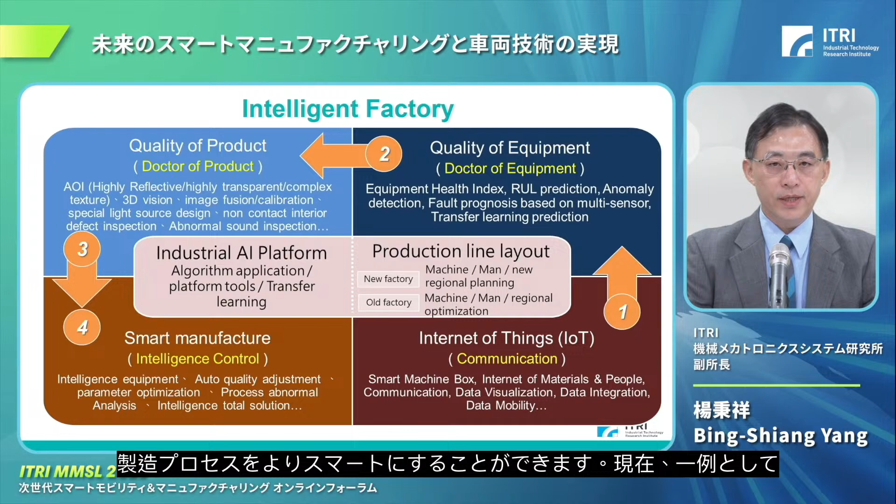For the intelligent factory, we try to connect equipment and materials together with Internet of Things. We also have sensors integrated with our algorithm to quantify the status of the equipment, then connect the equipment together with the parameters. We also incorporate AI technologies in different stages of manufacturing to control the quality of the product. To integrate all of this means we can make the manufacturing process smarter. Here is an example. Now we try to integrate systems.

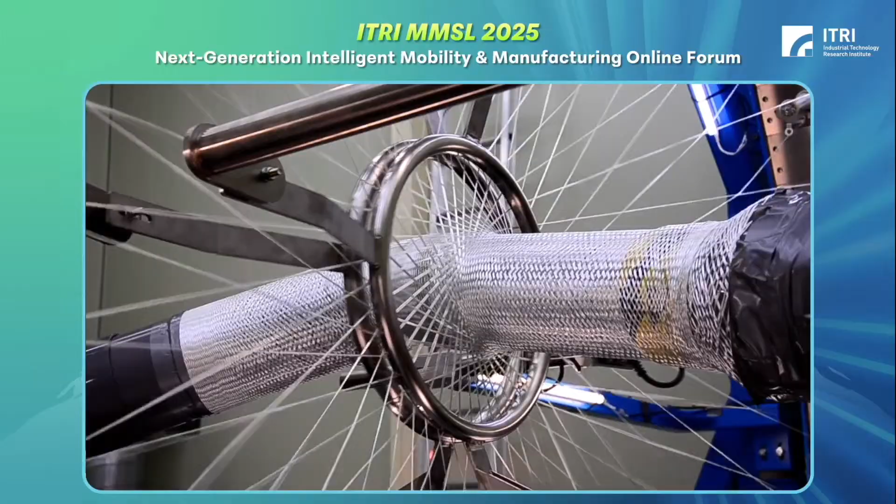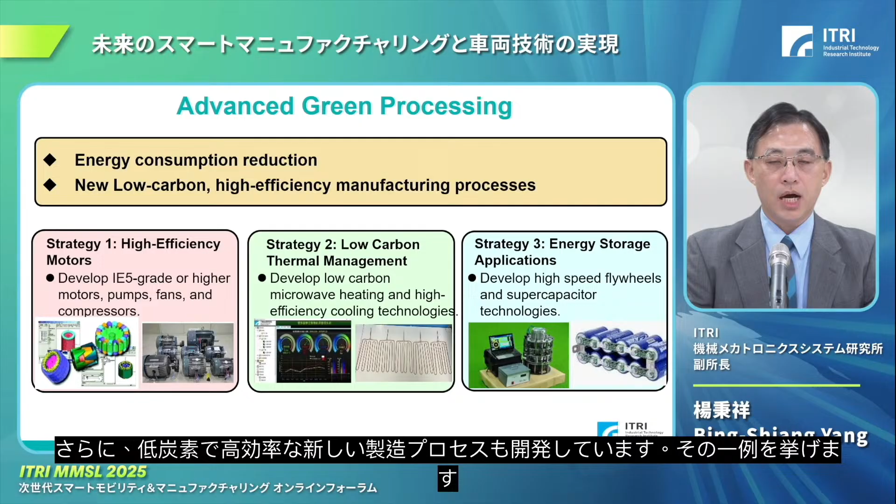As a world trend of low carbon or zero carbon emission, we try to reduce energy consumption in different manufacturing processes with different strategies. The first is to provide high efficient motors that can be used in different stages of manufacturing, and also low carbon thermal management systems with energy storage applications, such as high-speed flywheel technologies and supercapacitor technologies. We also developed new low-carbon, high-efficiency manufacturing processes.

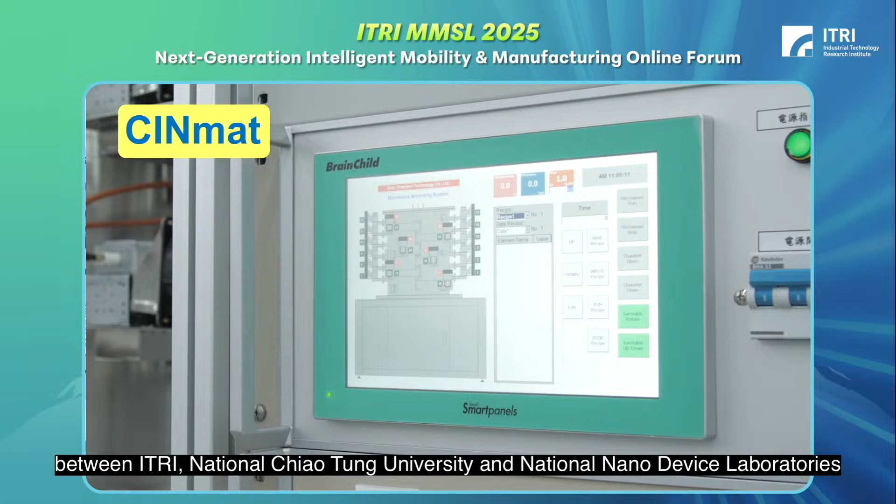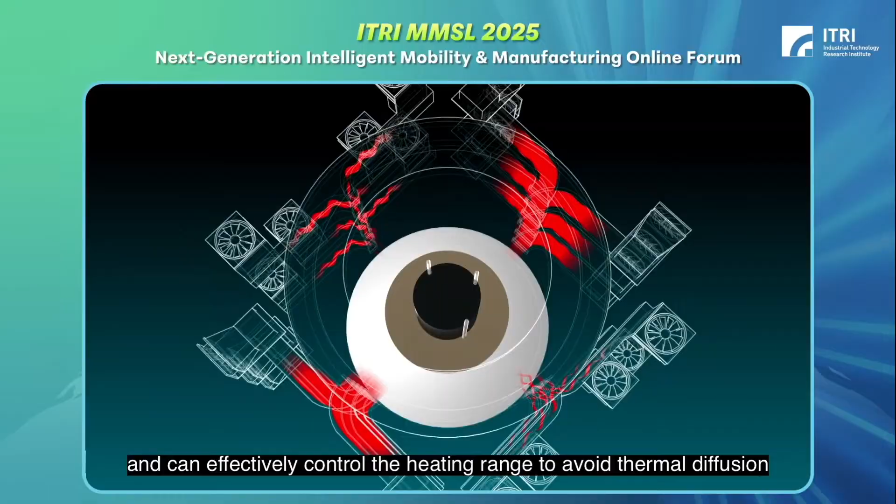Here is an example. CINmat microwave annealing technology is the result of a tripartite collaboration between ITRI, National Chiao Tung University, and National Nano Device Laboratories. It can process multiple wafers at one time and can effectively control the heating range to avoid thermal diffusion. The technology saves a great deal of time and energy compared to rapid thermal annealing.

The frequency of the microwave tubes used in the new technology is 2.45 gigahertz, the same as that of a typical domestic microwave oven. A 2.45 gigahertz magnetron costs only about one-tenth of the price of the 5.8 gigahertz high-frequency microwave magnetron currently used by manufacturers, while its average lifetime is six times longer, which greatly reduces maintenance costs.

As you might know, Taiwan is famous for semiconductor manufacturing, so we also have a division dedicated to these technologies. We use multi-physics simulation in different stages of the manufacturing process, such as plasma etching or deposition and wet process for advanced packaging. We also provide grinding and polishing equipment that can be used on different materials, including optical components.

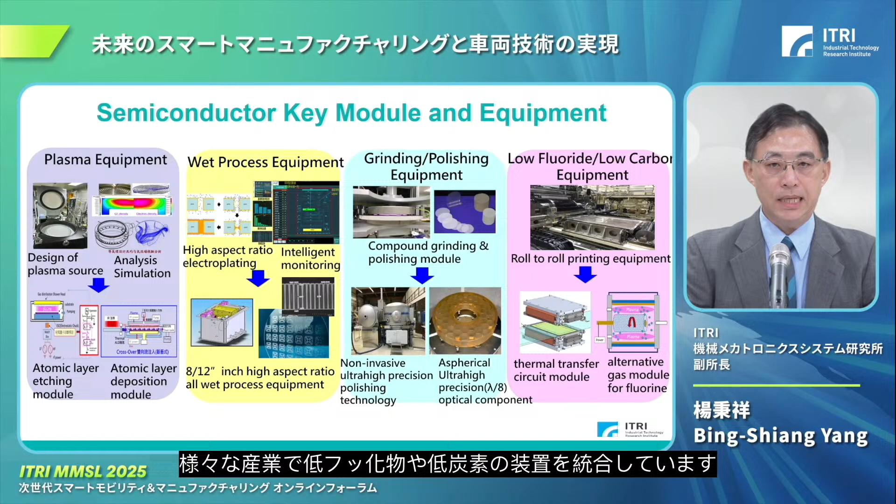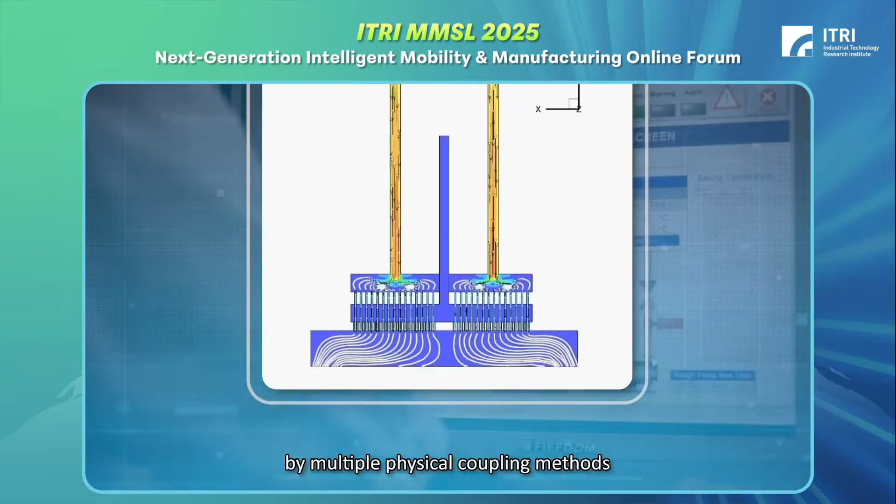We also integrate low fluoride or low carbon equipment in different industries for green technologies. The following is the principle of the hybrid ALD equipment. The vertical flow field is simulated by multiple physical coupling methods into the 12-inch process chamber through the aeration module, and the special aeration hole design is used to improve the uniformity of the overall chamber flow field.

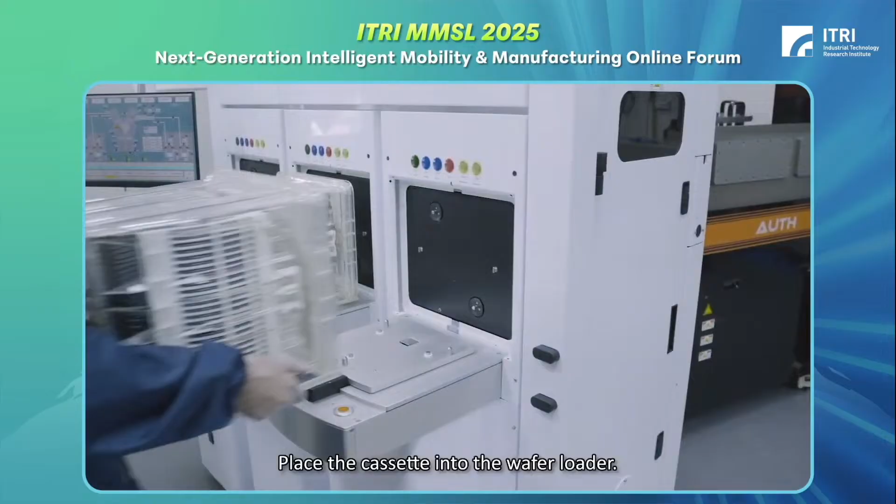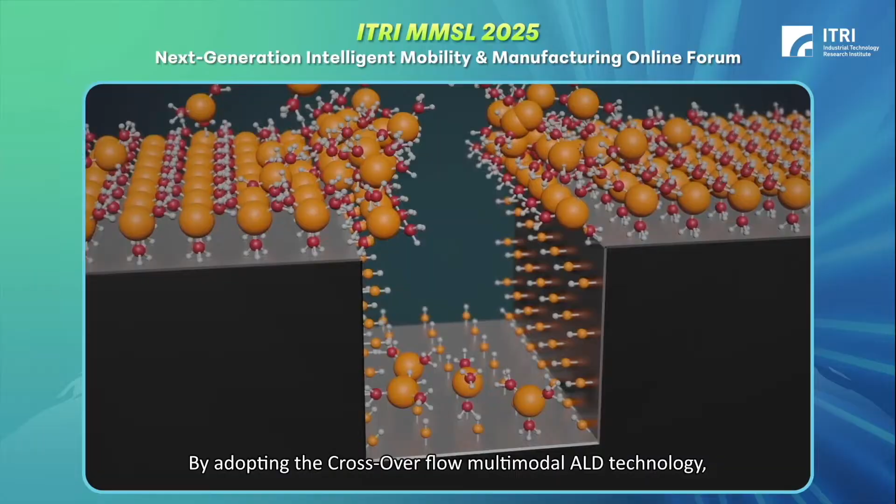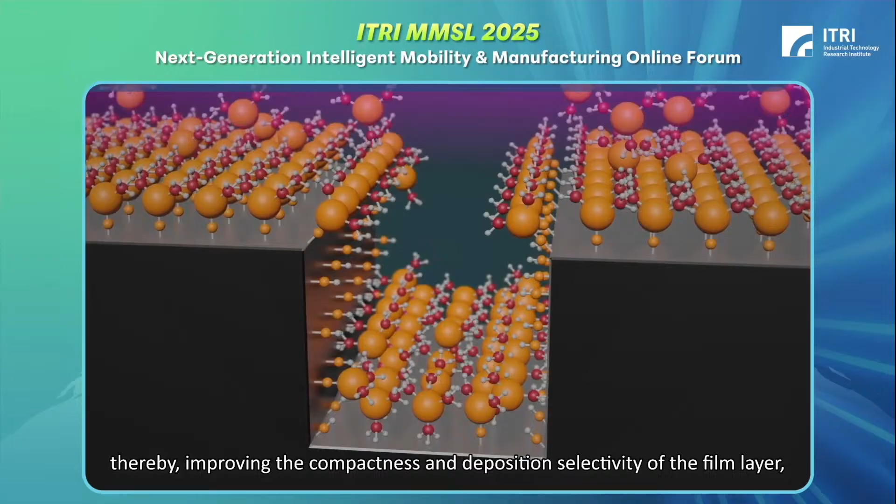Place the cassette into the wafer loader. System parameter confirmation. By adopting the crossover flow multimodal ALD technology, the thermolysis and plasma bias dual mode is used to enhance the collimation of deep hole coatings, thereby improving the compactness and deposition selectivity of the film layer, achieving multi-composition, high-step coverage, and uniform coating deposition.

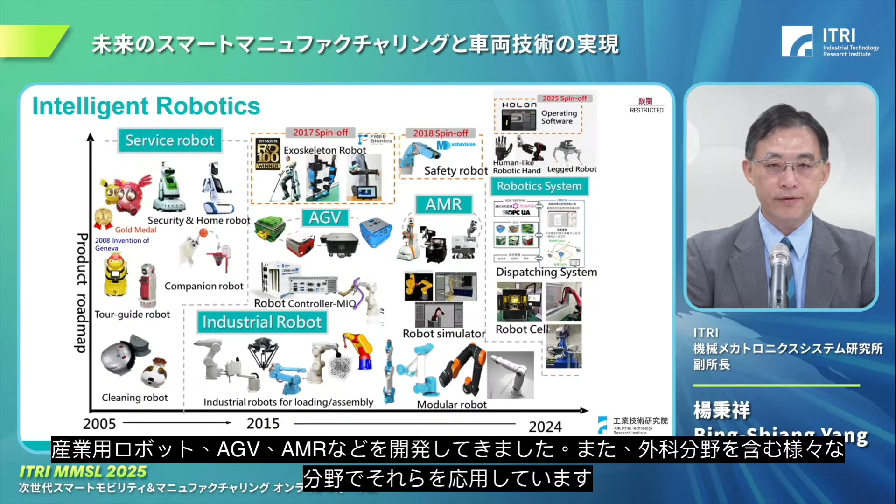The robot arm removes the wafer from the process chamber and transfers it to the discharge chamber. To combine the different manufacturing processes, we need robotic technologies. Over the past 20 years, we have developed different types of service robotics, industrial robots, AGVs, and AMRs. We also apply these in different fields, including surgical fields. We recently have international collaborations with many European countries on handling AI-enhanced robotic technologies for flexible manufacturing.

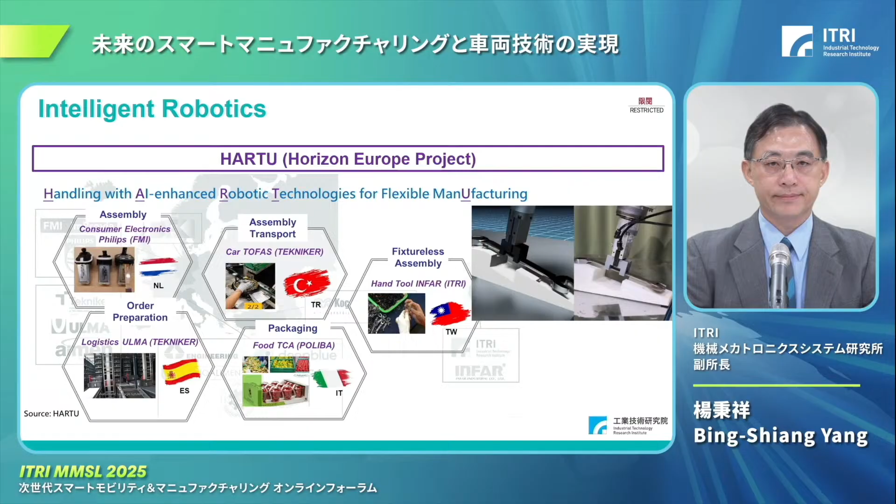That's for manufacturing. Now for mobility, we developed technologies to fulfill the needs for electric vehicles, from fast charging stations, onboard chargers, battery packs, energy management systems, vehicle control units, even inverters and motors. We work with industrial partners to develop the whole system.

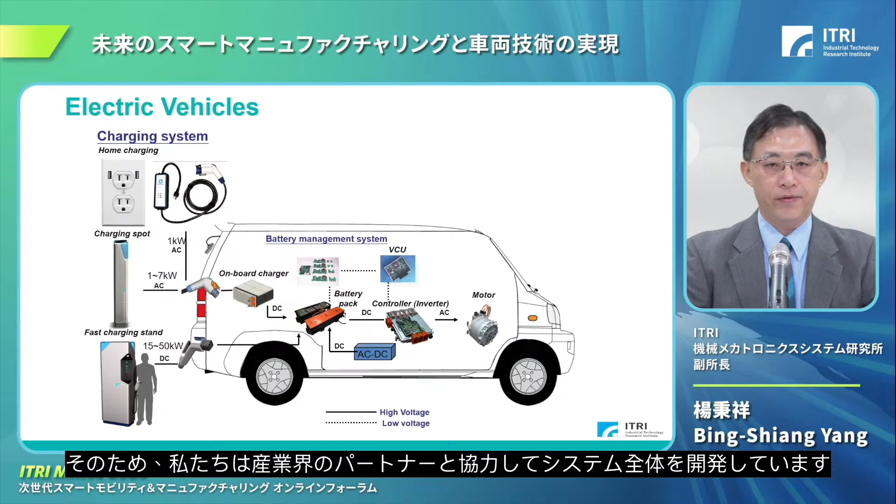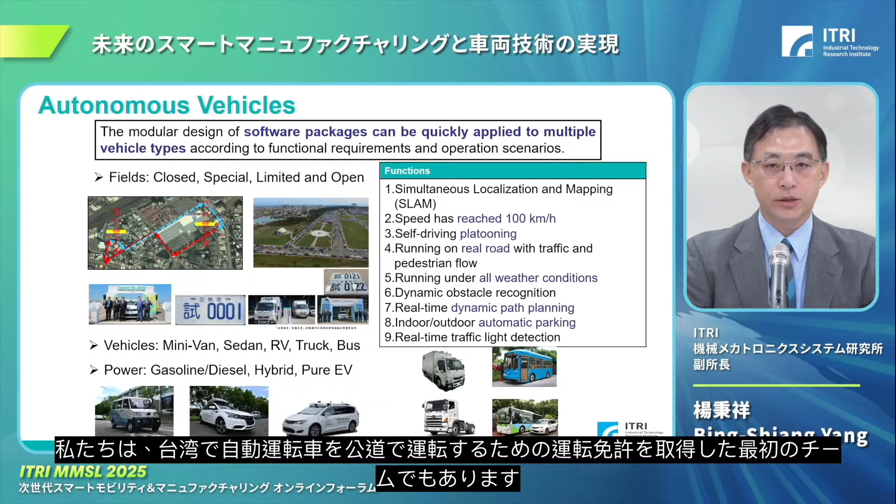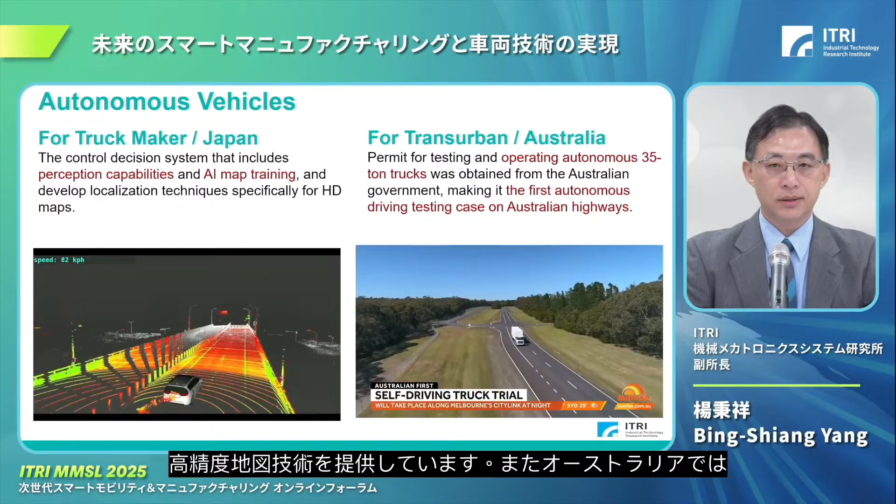We are also the first team to have the driving license to drive our autonomous driving vehicles on real roads. Now we have different types of autonomous driving vehicles. We also export these technologies to international partners, such as in Japan. Now we have high-definition map technologies, and in Australia we can drive a 35-ton truck on the highway.

As for ground vehicles, in the air we also have unmanned aerial vehicles. We target more on the high payload, specific application UAVs. Over the past few years, we have developed flight control technologies, high power motor generating technologies, and integrated them into systems with different payloads and applications.

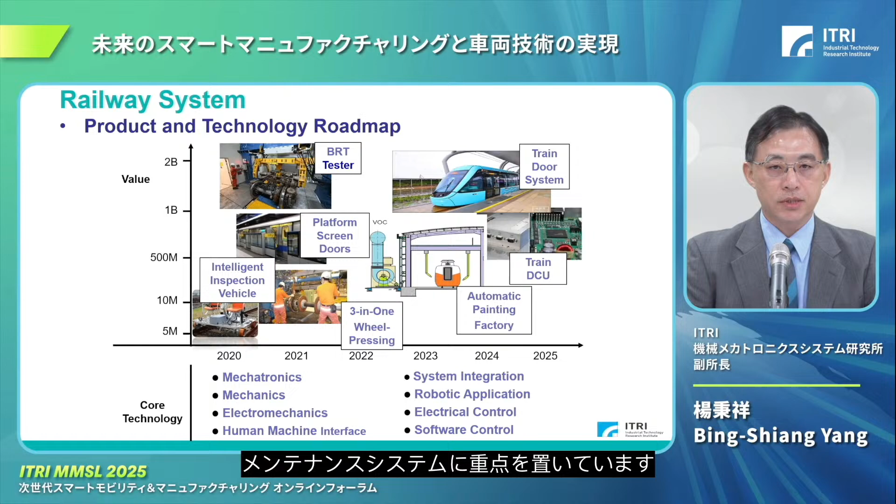So with this, I give you a quick overview of our capabilities. If you are interested in any of the technology, feel free to contact us.

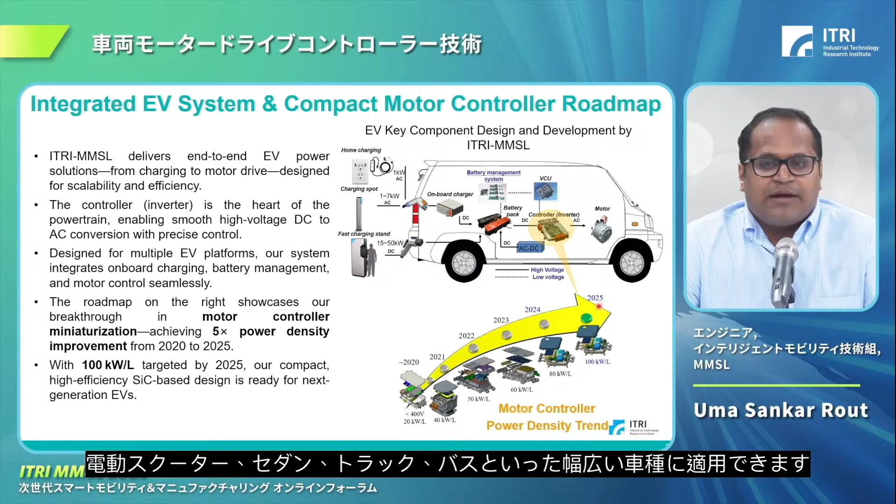Now let me take you behind the scenes of how we make sure every motor controller works right the first time. We begin with detailed 3D multiphysics simulation to analyze the heat, magnetic flux, and electrical stress. We tweak the design until it meets thermal and loss limits. Next, we build the prototype and run the double pulse test to assess the switching losses and voltage overshoot in real circuits.

In hardware-in-loop testing, we connect the controller to a real-time simulator emulating a motor. This allows us to run thousands of fault cases safely and efficiently. In vehicle dyno testing, the controller is mounted on a real vehicle in our dyno lab to evaluate the efficiency map, acoustic noise, thermal rise, and system response during actual drive cycles. Each stage helps us catch potential issues early, reducing prototype iteration, saving time, and cutting costs.

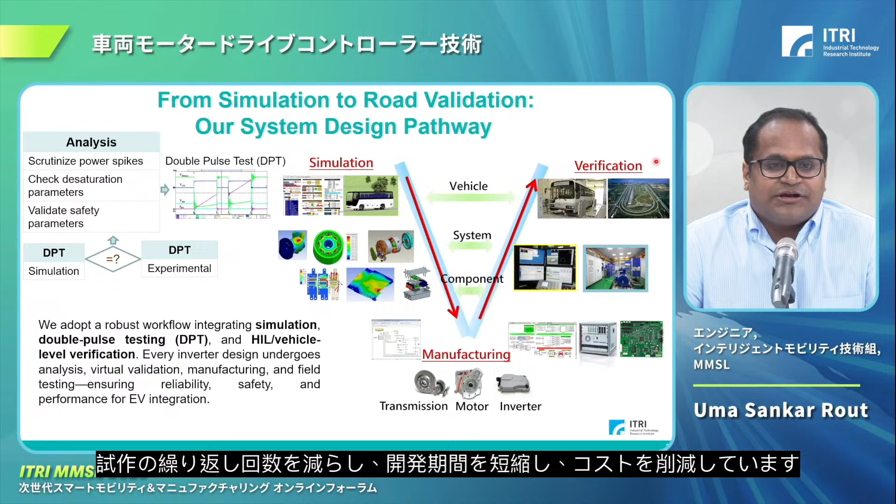Quality is our promise. We operate four specialized labs. Virtual vehicle labs validate the control algorithm across millions of virtual kilometers. Power labs measure efficiency, EMI, and transient voltage behavior. Battery and charger labs ensure communication reliability across chargers, BMS, and environmental extremes. Vehicle labs execute complete vehicle validation: vibration, splash water, dust, and shock.

We also follow a strict pre-test checklist: cable torques, sensor calibration, emergency stop mechanisms, proper fuse settings. For endurance, we test the inverter at 85 degrees Celsius for hours, subject them to hours of multi-axis vibration, and assess corrosion in salty spray chambers. Thanks to this rigorous process, our field failure rate is very low, ensuring low recalls, longer uptimes, and happier drivers.

We follow a modular design philosophy. Power module blocks contain SiC switches, DC bus blocks integrate high density ceramic capacitors, gate driver blocks control each switch precisely, and control boards execute the advanced motor controller algorithms. This block-based approach allows us to serve multiple vehicle classes, from 6 kilowatt scooters to 250 kilowatt heavy duty trucks, all using the same scalable architecture.

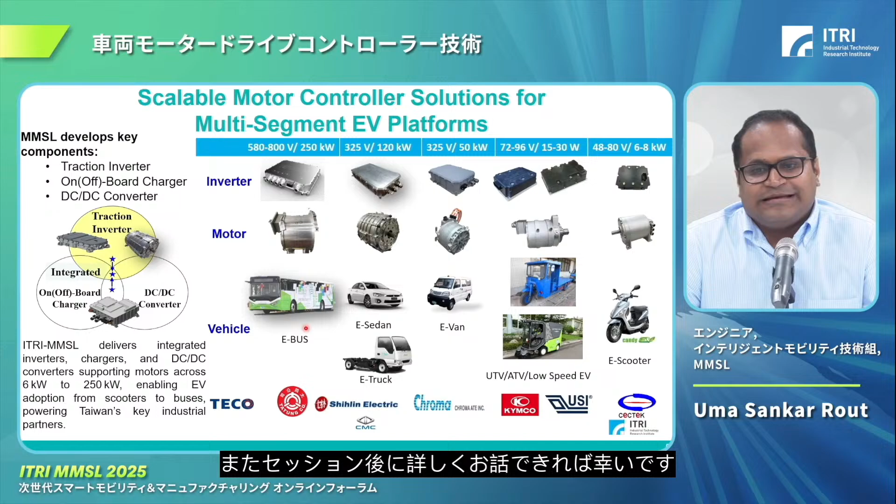We have combined SiC technology, compact power design, and rigorous validation to deliver a compact, reliable, and scalable motor controller solution for the EV industry. We welcome partners ready to join us in pushing the boundaries of what electric vehicles can achieve. Thank you for your attention. I'm open for questions now, or happy to discuss details with you after the session.

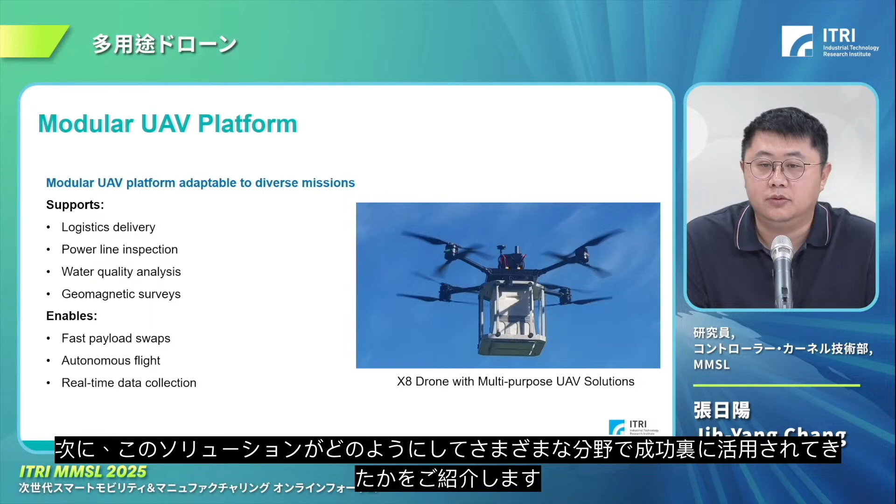Next, I will walk you through how this solution has been applied successfully across various fields. From left to right, here are three key application scenarios of the X8 drones.

On the left-hand side is logistics delivery. The X8 drone enables efficient transport of goods to destination locations. The key benefit is reduced labor cost and improved delivery efficiency.

In the center of this picture is the power line inspection application. We developed and use AI-based image recognition so the drone can accurately detect the position and temperature of high voltage power lines to identify damage or overheating problems. The key benefit is greatly shortened inspection time and early detection of faults, allowing timely maintenance and reducing overall operational costs.

Finally, on the right-hand side is the water quality sampling application. Traditionally, sampling water in large reservoirs required a lot of labor, which was time-consuming and inefficient. However, with drones, water samples can now be collected rapidly and accurately. The key benefit is minimized manpower needed, accelerated data collection, and improved overall efficiency of water quality sampling.

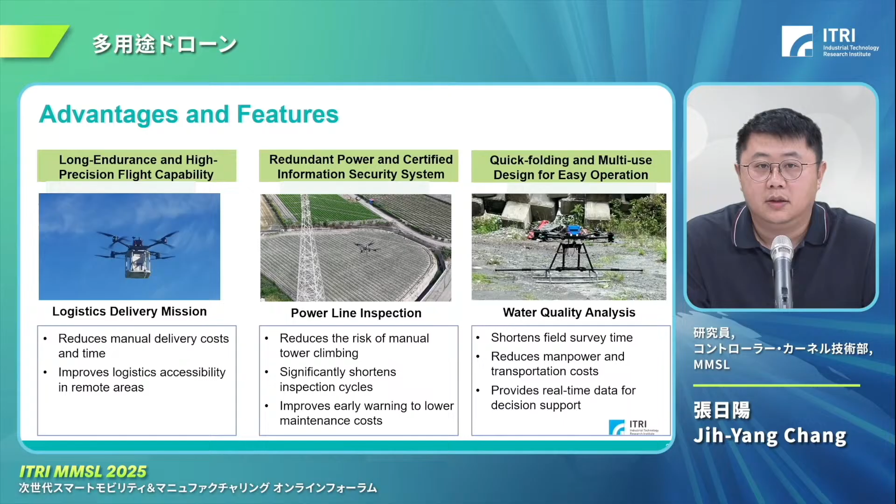Our multi-mission drone solution is designed precisely for this high-value segment. Its target is to be practically deployed in areas such as logistics delivery, infrastructure inspection, or public military service missions, ensuring the UAV technology delivers real-world impact and value.

Next, I'd like to share some real successful cases. This case is as shown in the slide - we integrate the X8 drone into logistics delivery applications.

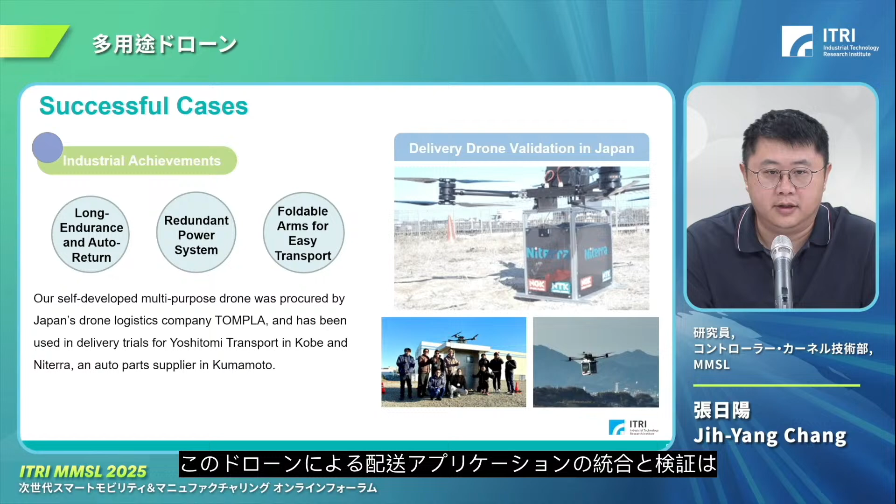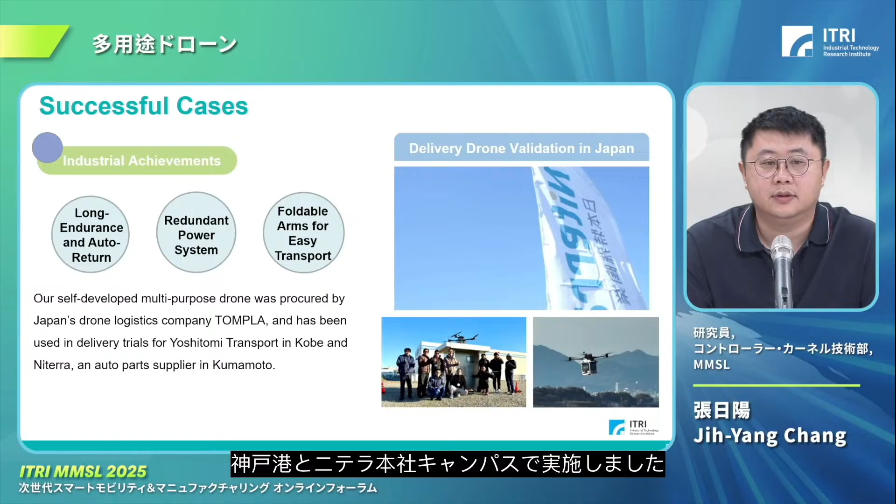We cooperate with a Japanese company named TOMPLA, which is focused on logistics technologies. We conducted integration of the drone for delivery applications and validation at Kobe Port and the Niterra headquarters campus. This cooperation not only demonstrates the mission but also serves as a strategic step towards entering the Japanese market.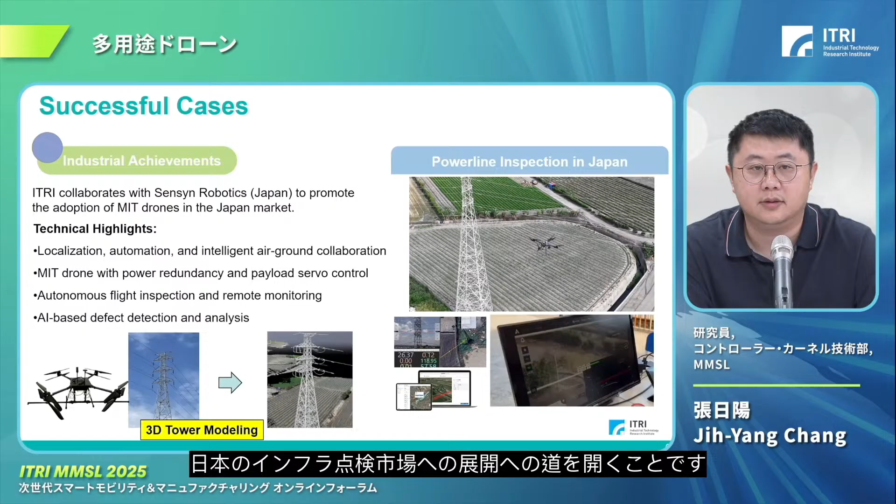Lastly, we'd like to share another successful case, this time in collaboration for water quality sampling. We equipped the MIT drone with a system for harvesting water samples and performed a live demonstration at Sun Moon Lake in Nantou, Taiwan.

Compared to traditional manual sampling, the drone-based solution reduced operating time by over 80% and significantly lowered the manpower needed. These cases highlight the strong potential of UAVs in environmental monitoring and sampling, especially for fast, large-scale water sampling operations.

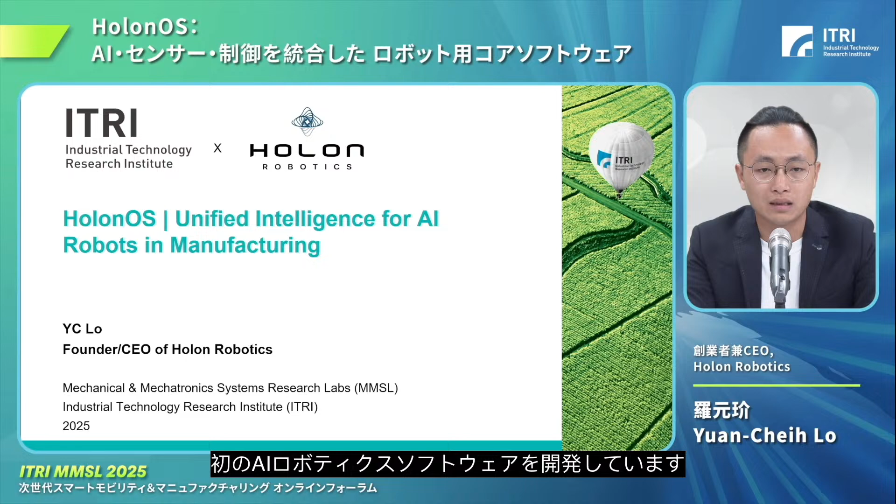Holon Robotics is a software company. We preserve industrial knowledge through AI, and we preserve manufacturing knowledge through automation by unifying AI, robots, and sensors, making intelligent manufacturing a reality.

We have 7 experts across robotics R&D, finance, marketing, and operations, combining technical depth with business execution. After 4 years incubating in ITRI, we officially spun off this year and closed a 0.5 million dollar angel round.

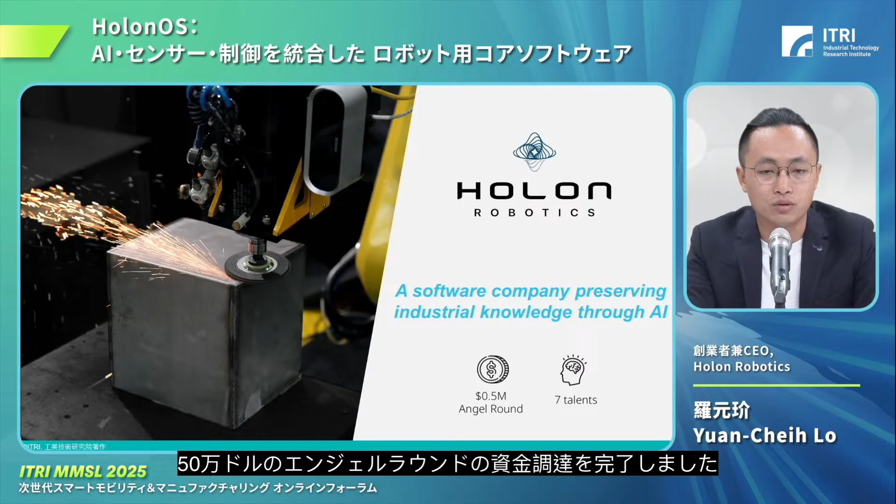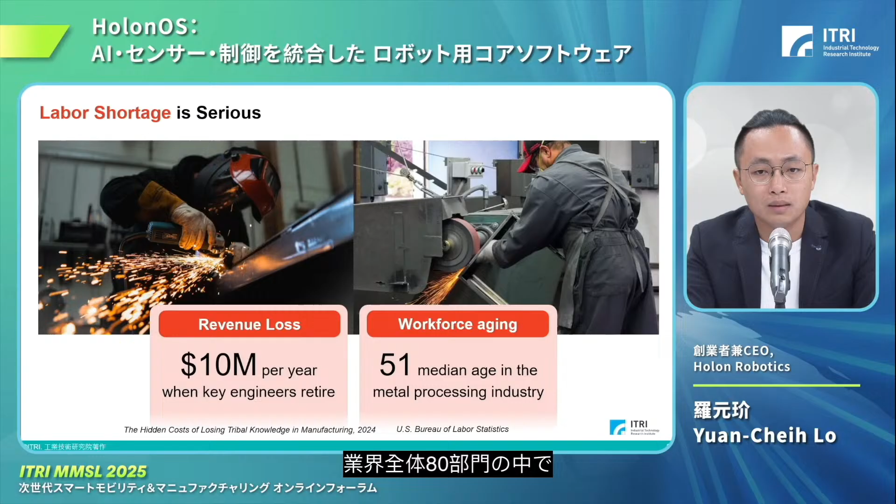As labor shortage is serious and happening around the world, in manufacturing, companies lose up to 10 million in revenue when their senior engineer retires or exits. In metal processing, it's much more urgent. The median worker age is 51, the highest among 80 other industries.

After 30 years of automation, what's holding it back? Three reasons. Industrial robots have been limited to mass production, requiring specialized expertise, complex programming, and manual adjustment. First, hard to learn. Manufacturers need at least 2 years to train a robotics engineer, making skilled labor a major barrier, especially difficult because we are facing a labor shortage issue.

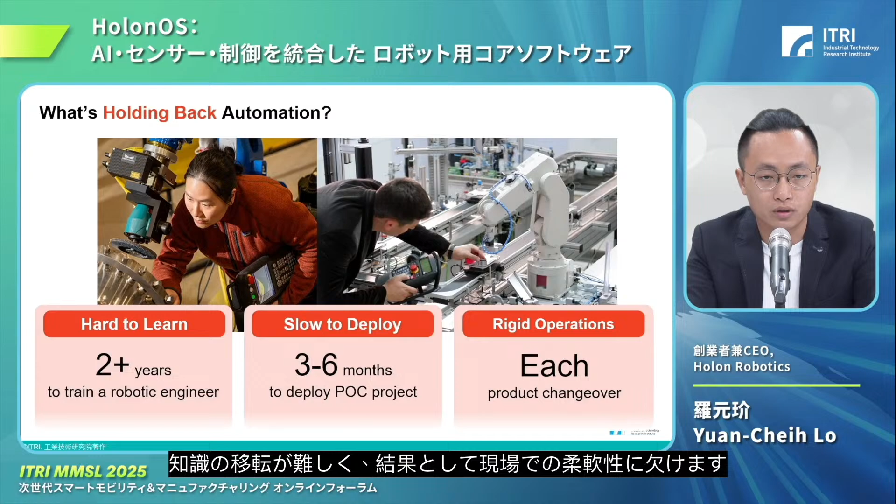Once they leave, the knowledge goes with them. Second, time-consuming. Developing, testing, and validating a robotics automation project takes 3 to 6 months to ensure production feasibility, making the process highly time-consuming. Third, rigid. Even after deploying robotics automation in production, every changeover needs manual reteaching and adjustment. The knowledge is hard to transfer, making robotics hard to use in today's fast-changing manufacturing needs.

So we envision the robot not as a tool, but as an intelligent, self-evolving partner. That's why we built an AI-driven operating software with a human-in-the-loop approach. It allows the robot to learn directly from the operators and turn the experience into intelligence. We make robots that don't just do tasks, they understand how to do tasks.

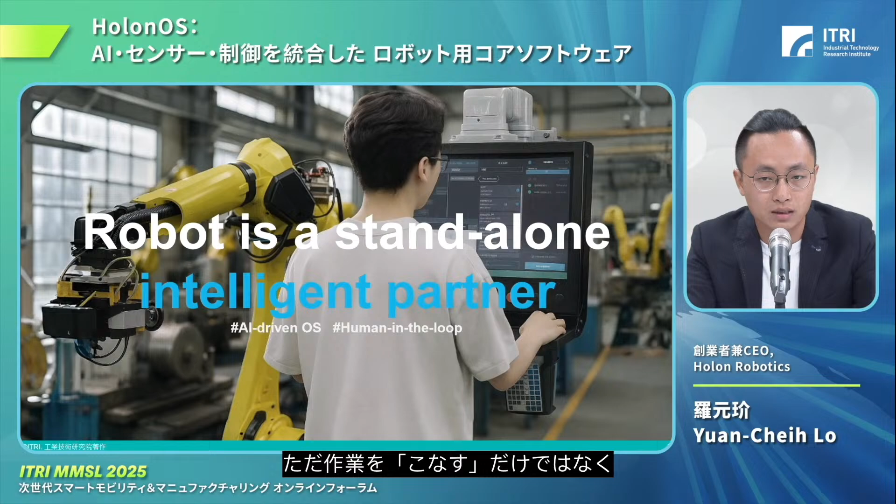To do that, we simplify the process to save 85% of the time. Meanwhile, our solution can continuously learn from the operator's experience. Eventually, this will lead to a 30% boost in productivity.

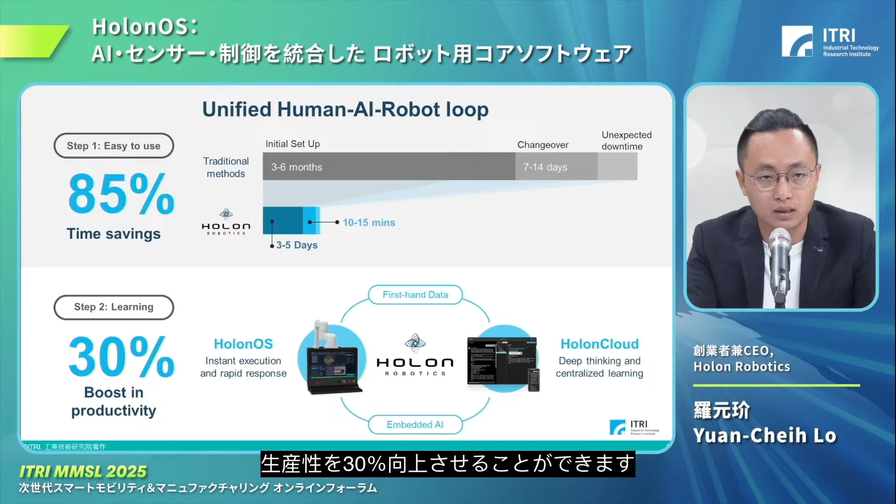To achieve these two goals, we designed two products for each purpose. We built two integrated products, HolonOS and HolonCloud. The idea is like iOS and iCloud working together. HolonOS is a control panel, a complete hardware and software solution designed for instant execution and rapid response for robots and sensors. HolonCloud is a cloud-based platform for deep thinking and centralized intelligence, enhancing AI-driven capabilities for robotics and sensors.

HolonOS, an edge AI control panel, featured with, first, a unified interface. It eliminates the sensor and robot integration time. It supports leading robot brands like Fanuc, ABB, Yaskawa, KUKA, and Mitsubishi. It integrates 2D vision, 3D vision, laser line scanning for sensors, active force control, PLC, and I/O modules, all to save integration time.

Second, a code-free path generation engine with just 3 simple steps: scan, path generation, and deploy. Simply place the workpiece and the 3D scanner automatically senses its geometry. The user can interactively adjust and generate the robot path. Seamlessly deploy in a unified interface, eliminating the need for CAD models or manual teaching.

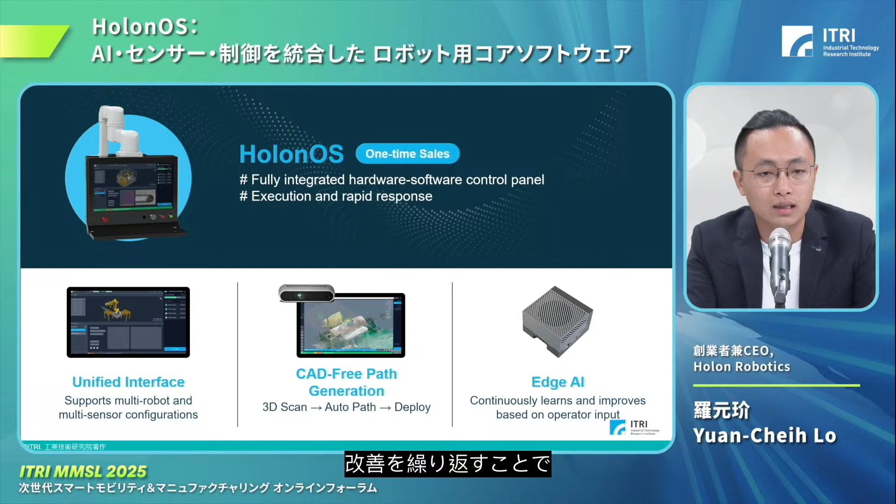Last, an edge AI. That's how our HolonOS can learn and improve directly from first-hand data, based on any operator intervention, making the robot actually learn from the human.

HolonCloud, a deep thinking and learning service with AI code generation. Generate robot code from the process idea in minutes, saving programming time. It creates accurate robot programs based on process requirements. It also acts as an AI assistant, answering technical questions instantly. It's embedded with system knowledge, including maintenance manuals, operation guides, mechanical and electrical diagrams, ensuring precision and efficient support, saving troubleshooting time.

Our go-to-market strategy is simple and clear. We directly bring value to the end user to save time and increase productivity. We collaborate with system integrators to accelerate deployment and amplify word of mouth. Once we achieve product-market fit, we will scale through distributors and key suppliers to build a global sales network and scale rapidly.

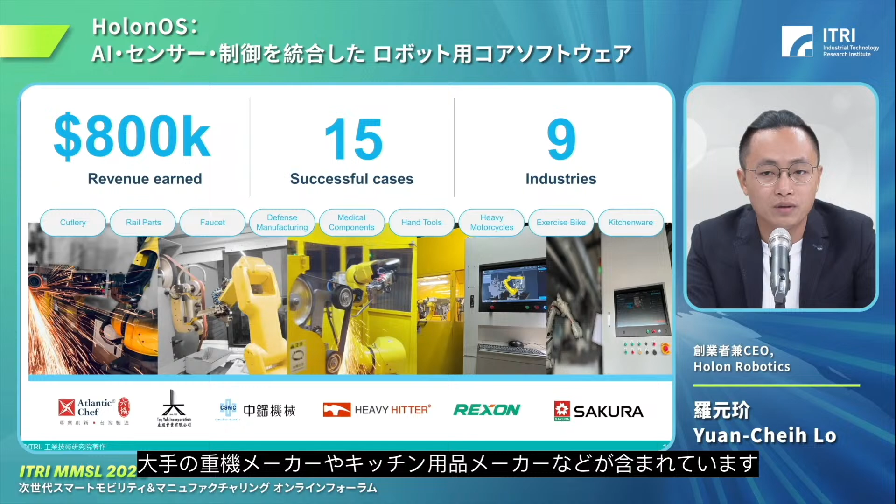Today, Holon Robotics has delivered 15 successful cases across 9 industries, with $800,000 in revenue, in sectors including medical, cutlery, defense, and grinding, one of the largest cutlery and heavy machinery manufacturers, and kitchenware companies. Also, we co-market with industrial leaders including Fanuc, Mitsubishi, Neousys, and the NVIDIA Inception program.

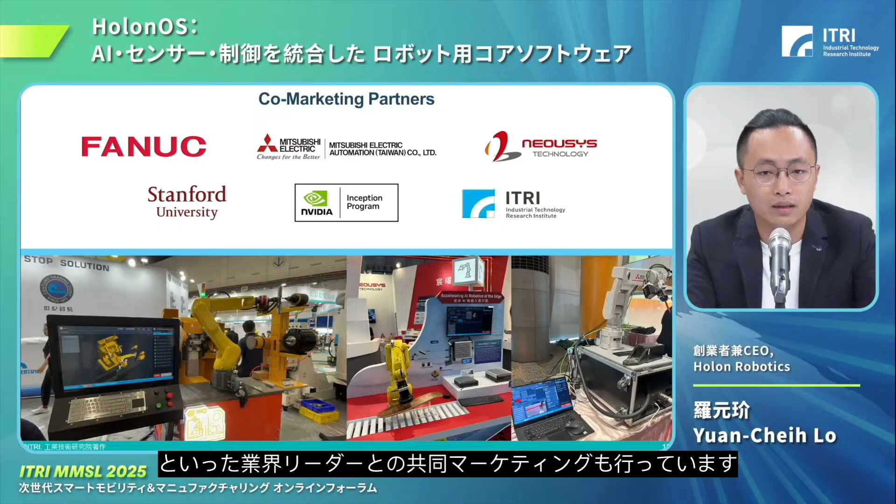One of our success stories is in the cutlery industry. Changeovers in cutlery manufacturing are a real headache. Parts are never perfect, usually meaning tedious manual adjustment because of unavoidable preprocessed workpiece differences. HolonOS, paired with a laser line scanner, automatically measures each workpiece's geometry and generates an exact grinding path, removing setup time. Now customers can swap between 15+ product types on the same line and have already processed over 300,000 parts with a 30% productivity increase.

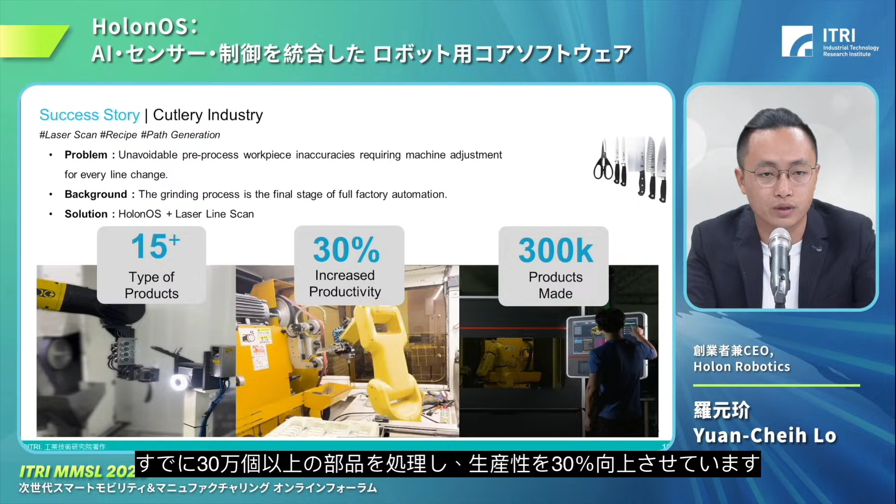The same issue happened in the motorcycle and fitness bike industry. With unavoidable preprocessed workpiece differences, HolonOS, with laser line scanning, captures each part's dimensions and auto-generates precision grinding and polishing paths, cutting setup time to minutes. The intuitive parameter interface turns complex adjustments into a few clicks, ensuring smooth production and consistent quality.

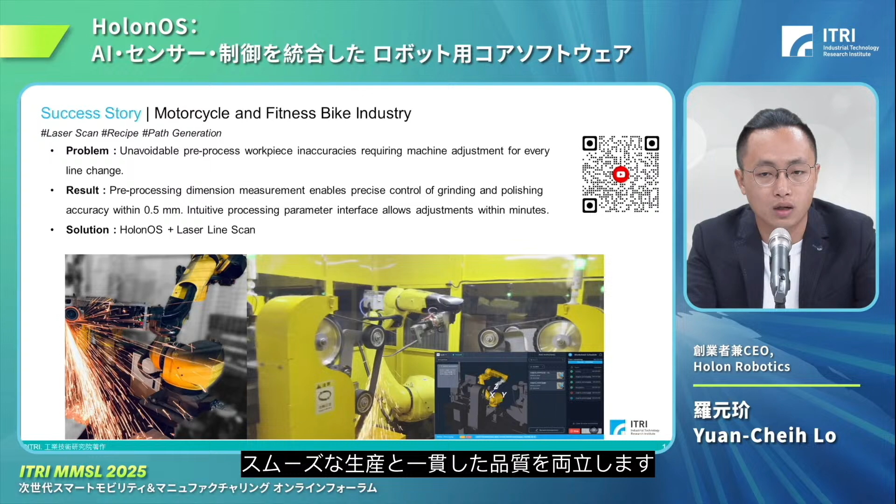So if you're excited about a future where robots should not just be a tool, but an intelligent partner, we'd love to connect.